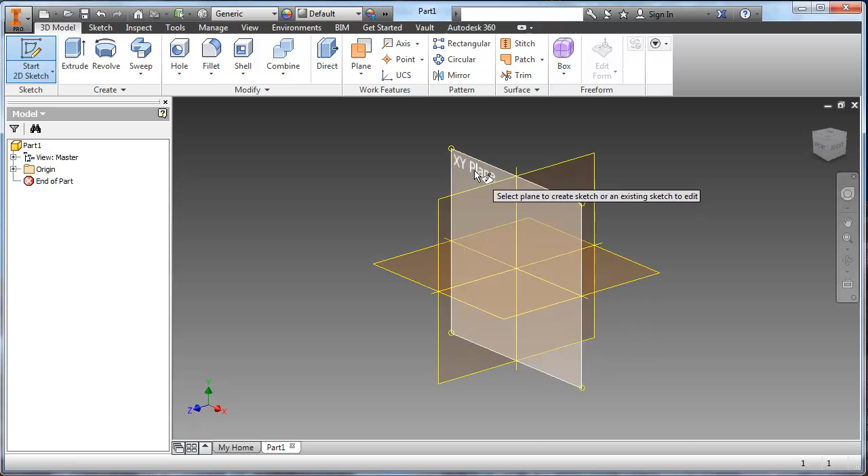I'll start by creating a 2D sketch, and I will choose this XY plane. That's a good place to start. Using this 0,0 reference can be really useful. I'm going to make that the bottom corner of this, and start putting this together.

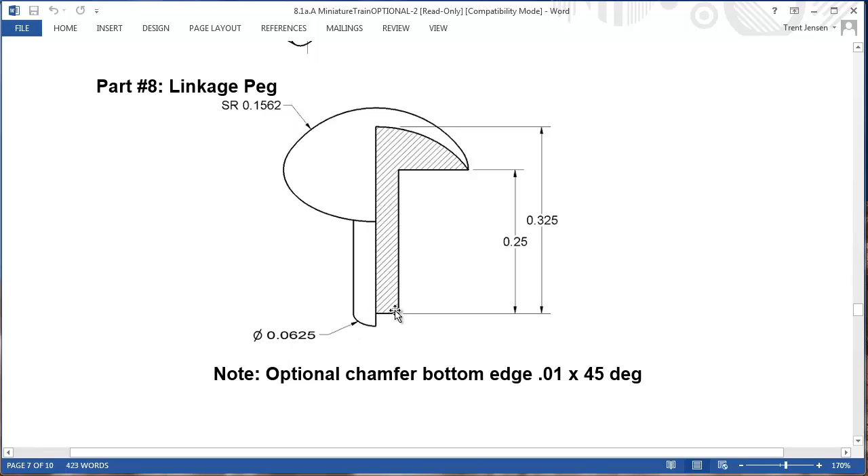What do I know about this? The bottom of it is 0.0625, but I'm only going to be drawing half of that, so I am going to put in half of that number. Let's start off with the basic shape.

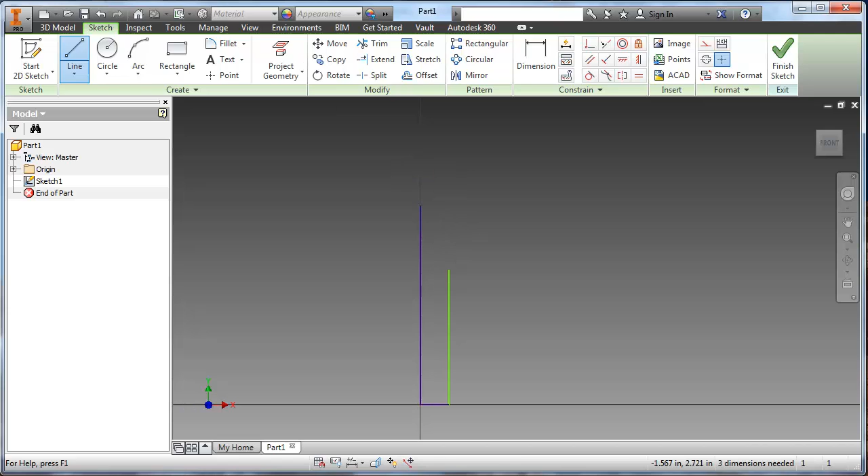I know that it comes out here a certain distance, comes out parallel. I don't know how far away this distance is, so I'm not going to include that yet. I'm going to draw another line, and then I have some kind of arc.

It goes to there. Now I'll start putting in the dimensions. The dimension of this, the radius, is 0.1562, and because it's given as radius, I don't need to change that number at all. 0.1562, much smaller.

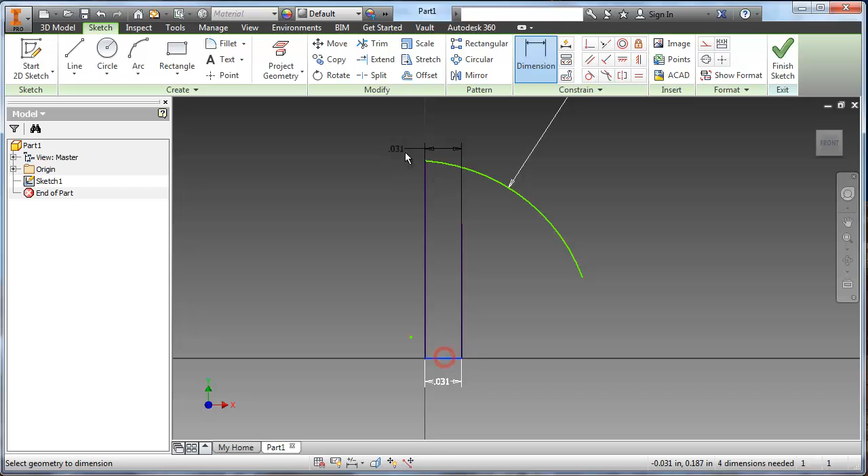I'm going to do half of 0.0625 here, so divided by 2. The total height we have from the bottom to the top of the arc is 0.325, and the distance from here to the top of this is 0.25.

Now, the last thing that I need to do is ensure that at the very top of this arc, right in the center, it is flat, so that when it revolves around on the other side, it's perfectly spherical, with this being the tangent at the top, and it doesn't dip in at all.

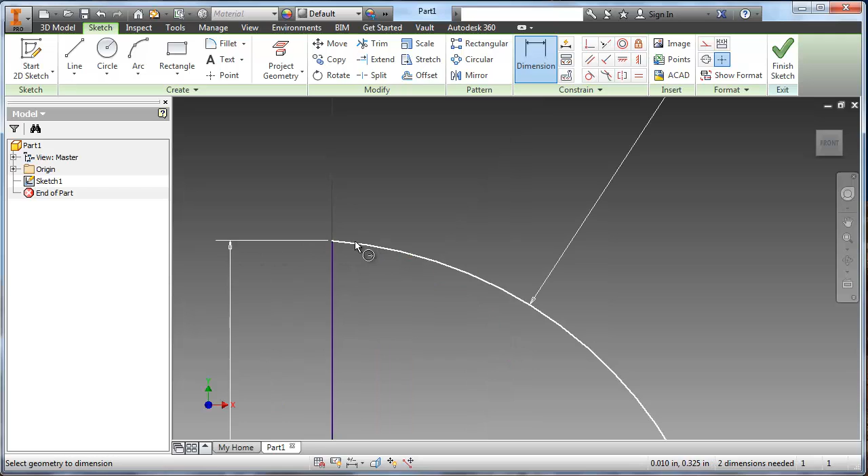The best way to do that, I found the easiest way, is I'm just going to draw a little line that continues past here. And you know what, I'm even going to delete this dimension. You don't have to do this, but if I delete that dimension, you can see what I'm doing.

I'm going to make this arc tangent to this line. So I'll click on my tangent constraint, make this arc tangent to that line, which makes it perfectly flat right there at that point.

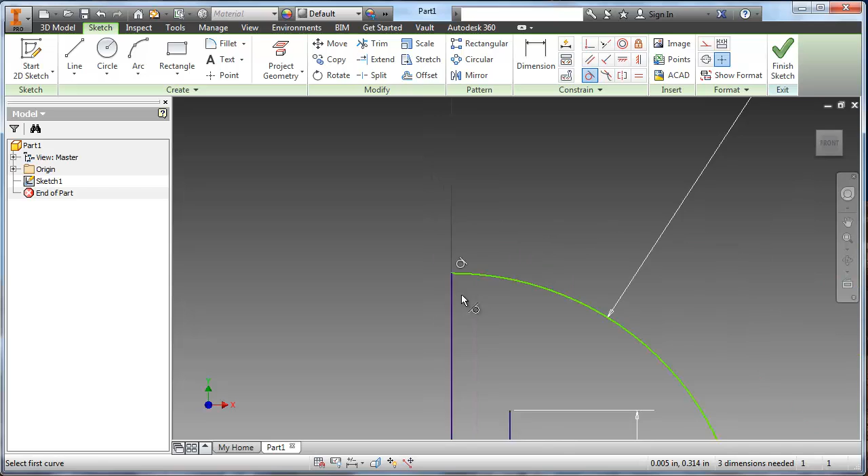Now, with this being 0.156 and tangent, this has to be the correct distance. So now I can just draw a line from here to here, and that has to be correct. I'll press X on my keyboard to get my trim and trim that little extra part off.

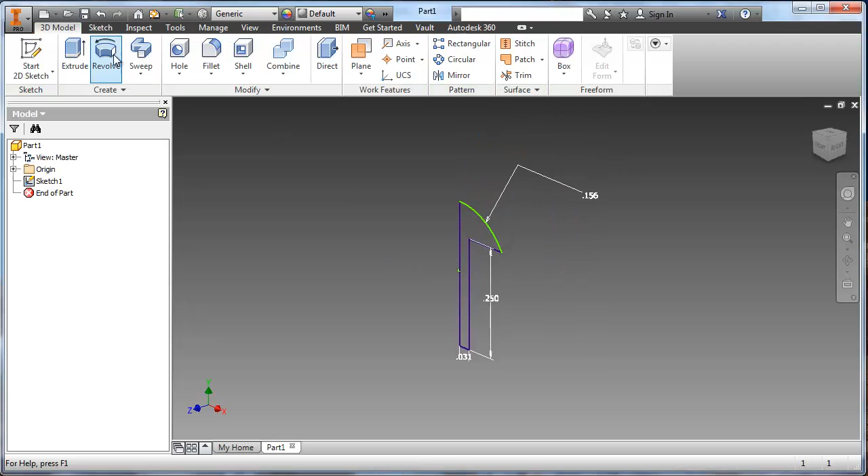And now I should be able to revolve this. I'll finish the sketch, go into revolve, and the profile is the first red arrow that it's looking for.

I'm going to click on that for the profile, choose the axis red arrow, and the axis is the line it's going to rotate around, which is, this would be the center. When I click on this...

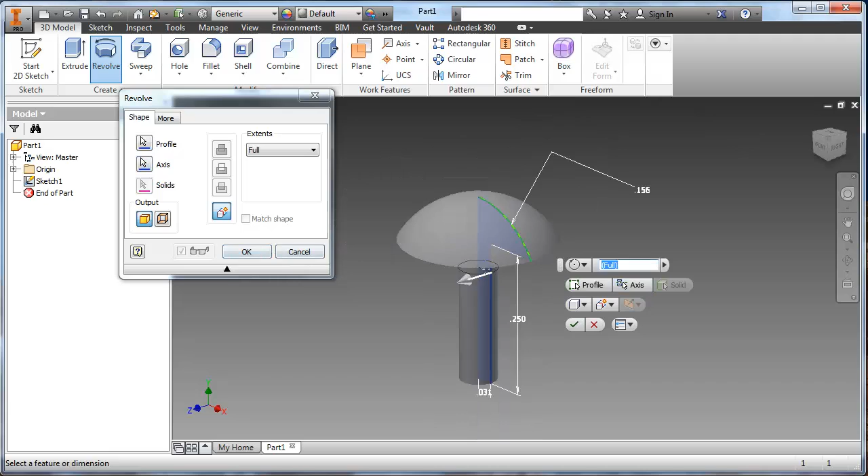It should rotate that specific sketch that I've drawn all the way around to create this part. And because it was tangent right at the top, you can see there's no little dip or anything right at that top point. It's just perfectly round all the way around.

And that is how you create the linkage peg. So you can save that, color it in however you want. You can color this train in any way that you want.

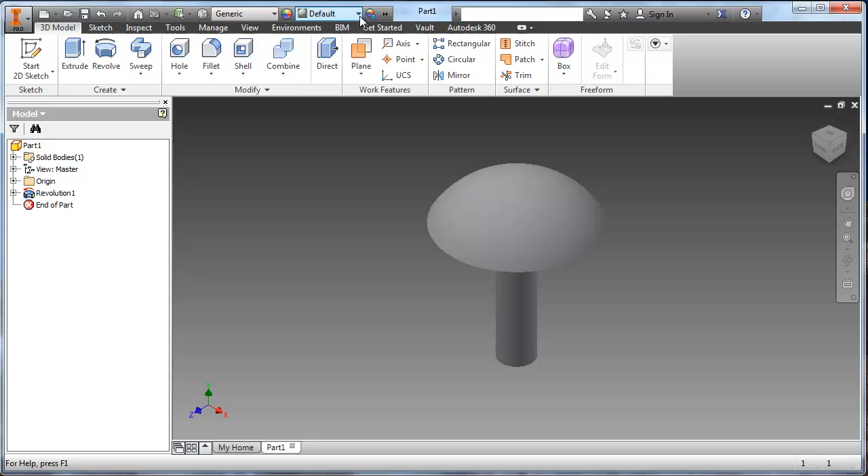Save the part file. Make sure you go to the big I at the top, choose Save As, and save that IPT file in your train folder with all of your other parts.